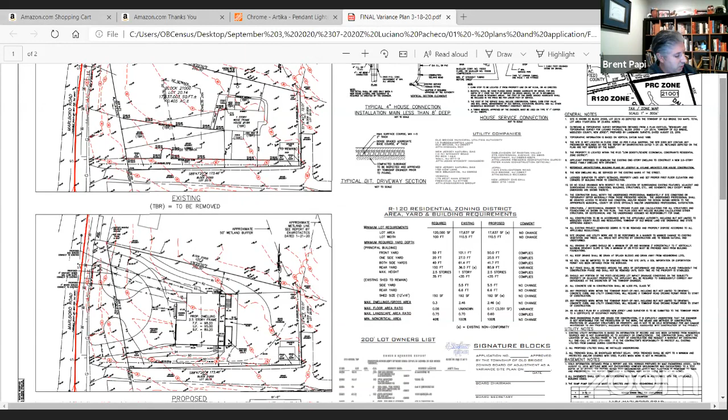I did see a shed size requirement. The shed size allowable was 150 square feet, or 12 by 16. This shed is 192 square feet in size, which is not going to change. The existing side yard, which will not change, is 5.5 feet, and the rear yard is 6.6 feet, and that will not change.

Okay, so Veena, we just need the variance then for the accessory structure size. I don't know if you heard - yes, we do. Okay, for the accessory structure size. And the deck, which is also an accessory structure? Right, that we know. Yeah, that we have already. Okay, so we have an additional variance then for accessory structure size. Okay, which is a pre-existing nonconformity anyway. Okay, thank you.

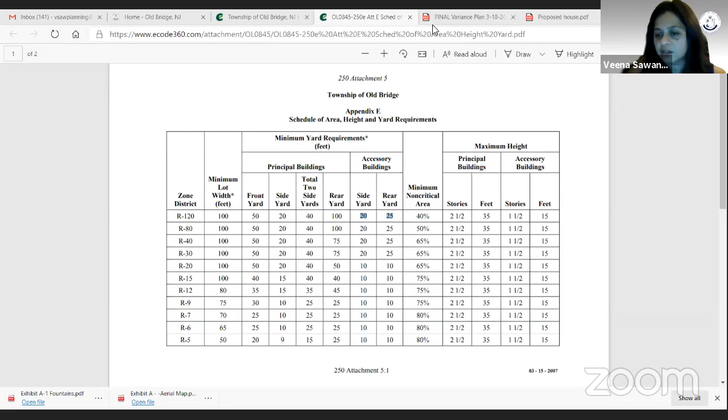I had a chance to quickly pull up the township's ordinance, and the shed, which is an accessory structure, requires a 20 foot side yard setback and a 25 foot rear yard setback. So the existing shed is in violation of the side yard and the rear yard, which are existing non-conformities. So that would require a variance, right? Yes. In fact, there are three existing non-conformities: the lot size, the side yard for the accessory structure, and the rear yard for the accessory structure, in addition to three new variances.

I'm not sure. Maybe the owner, Lou Pacheco, who's here, can answer that question. We'd have to put him under oath if he wants to testify. You want him to testify, Mr. Scogno? Do you want to know what happened? What is it going to be? No, I'm concerned if it's oil.

Oh, okay. Mr. Papi, can you answer that if you know? Otherwise we'll have to put Mr. Pacheco under oath. I don't know if it's currently oil. I just know that there's a gas service, from what I understand, coming into the property now, so I believe it's probably gas, but I can't verify if there's any oil there. Well, Mr. Pressler, this is your application, so is it okay if we put Mr. Pacheco under oath to find out? Yes, Mr. Chairman. Okay, Mr. Sachs? Sure. Mr. Pacheco, why don't you unmute yourself and I'll swear you in.

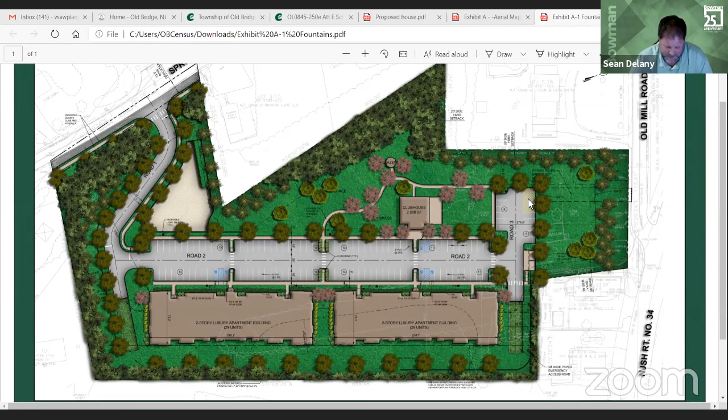I have some information on the buildings. If anybody has any questions about the architecture of the buildings, I can answer those for them. They were submitted in the package and show the breakdown of the units floor by floor, how many there are, how big the buildings are, the heights, and what the buildings will look like.

Sean, why don't we pull up that exhibit now, the architectural rendering exhibit? Okay, so that, I believe that was what was part of the submission package, 04 A1 elevations.

We're going to mark that. Right, these are the floor plans - sheets D3 and D2. They were part of the submission, so no need to mark them, just describe them.

This is a color rendering of the anticipated look of the building on the site. It's a typical residential style building with variations in the facade, 2 entrances along the front. Each unit has a balcony, with broken roof lines and mixed colors and materials to avoid a monochrome, less exciting building. The total height is just under 32 feet, 31 feet 7 inches per the plans, which complies with ordinance requirements, and it's only 2 stories.

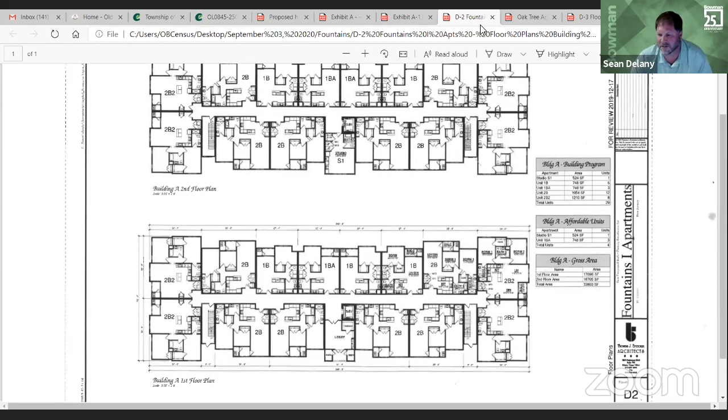There's another exhibit, the clubhouse architectural plans - you can bring those up and take a look. The architecture will be very similar to the roof lines of the residential buildings, keeping it in a very residential scale. That is a one-story building. When it comes up, it'll show gables on each side of the main entrance, with stonework at the base of the building that wraps around.

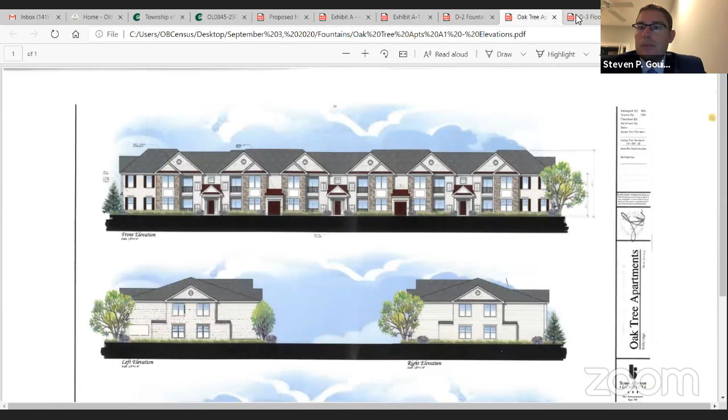Hey Sean, hold on a second. Can we pull up that exhibit? We're looking for the clubhouse rendering - it was item 02 on the submitted plans on the town's website. Just bear with me for 2 minutes.

Hey Sean, while she's working on that, let's just - oh, never mind, go ahead.

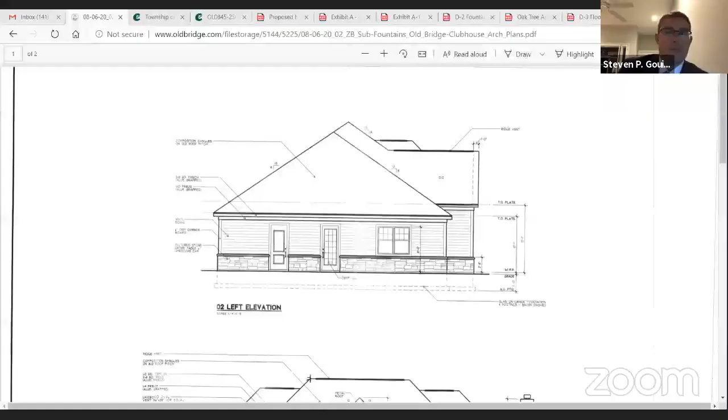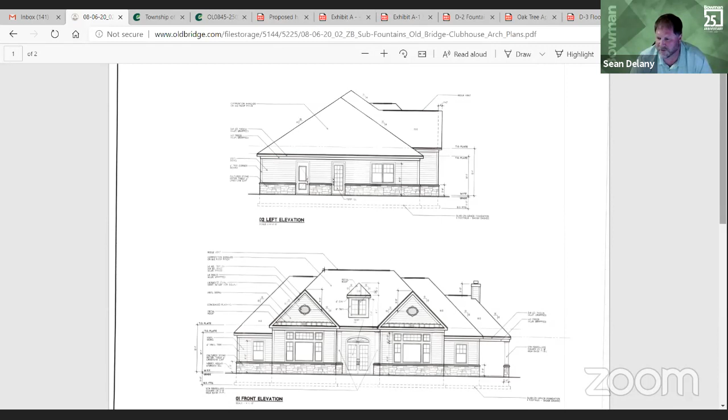As I was saying, very similar look as the residential buildings in the roof lines and roof treatments. There's a cultured stone water table around the perimeter of the building from the ground up, just under 3 feet with a cap. Then horizontal vinyl siding is proposed for the rest of the building. Nothing fancy - it's expected the materials will match and blend well with the apartment buildings as shown in the rendering. That's all I have for the engineering testimony.

Before we jump into the next part, let's clarify one thing - we received an engineering review letter from Mr. Dargy dated July 31st, 2020. Sean, you talked about some of the comments in that letter during your testimony, but essentially we can comply with each and every one of the recommendations, and we'll incorporate those between preliminary approval and final approval, so all recommendations would be incorporated into our final site plan when we come back to the board.

So what I provided testimony for, I believe, is some information that Mr. Dargy was looking for, and anything else remaining in that letter is standard items that we can certainly comply with and revise as needed and provide that information prior to a final application.

And I think the same thing goes for the August 3rd, 2020 planning letter. Obviously, you'll have to provide some planning testimony in a second, but same goes for that in terms of our compliance with those recommendations. Correct.

Okay, and I would have the same comments related to Mr. Lavallo's letter as well regarding the landscape. We would propose to meet with Mr. Lavallo on the site to look at the heritage trees that he's identified, locate them, as well as locate the other trees within the wooded areas on site that are being disturbed as part of the tree removal and tree replacement plan requirements of the town.

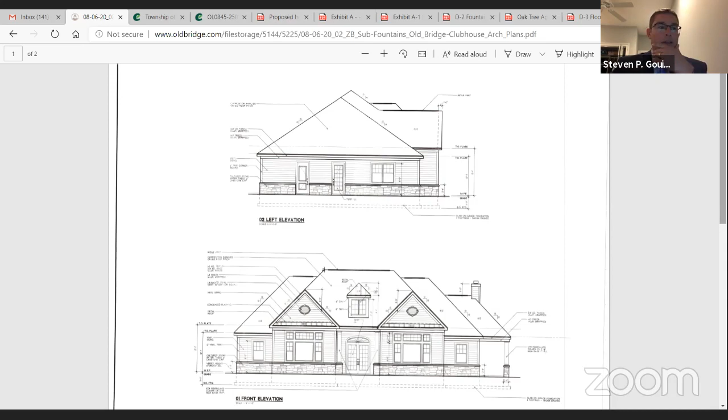So basically what we're saying is all of those letters, the fire subcode letter dated 7/24/20, the fire marshal letter dated 8/2/20, which was an email, and then a shade tree commission letter dated 7/28/20. So all of those, in addition to the engineering and the planning letters, we would have to incorporate any recommendations of those letters in our final site plan for when, if this application is approved and we resubmit to the board for final, we'd have to make those changes that are requested.

So we would agree with that. Mr. Chairman, I defer to you. I don't have any more for Mr. Delaney. I think you heard a lot.

I wonder if maybe we want to go through questions as to engineering before Mr. Delaney goes through his planning testimony. Perfect idea. I think it'll break it nicely and it'll give him a chance to catch up a little bit.

Mr. Dargy? Thank you, Mr. Chairman. I don't think I've stayed quiet that long in quite some time.

So Mr. Delaney did cover a lot of the items that we had requested that he provide testimony on in our review letter. Our review letter is dated July 31st, 2020. I do have a couple of quick things I do want to discuss, and I'm sure we might have some stuff later on in the presentation as well.

Mr. Delaney, did you say earlier on that the RSIS doesn't apply? Yes, we looked at that. We looked at your comment, looked at what we were proposing, and what we were proposing are not public roadways or roadways. In essence, they're acting really as site driveways to a development.

I appreciate what you're saying, but the RSIS specifically applies to whether they're private or public roadways. It applies to anything that's a residential development, be it single family or multifamily. The only exception that the RSIS makes, and I was just looking through it - that's one of the benefits of being here in front of my computer, unfortunately or fortunately - the only exception it makes is actually for residential driveways serving no more than 4 homes, whether they're individual or shared, serving no more than 4 homes. So unless there's some legal precedent or citation that you have, I would advise the board that the Residential Site Improvement Standards do apply.